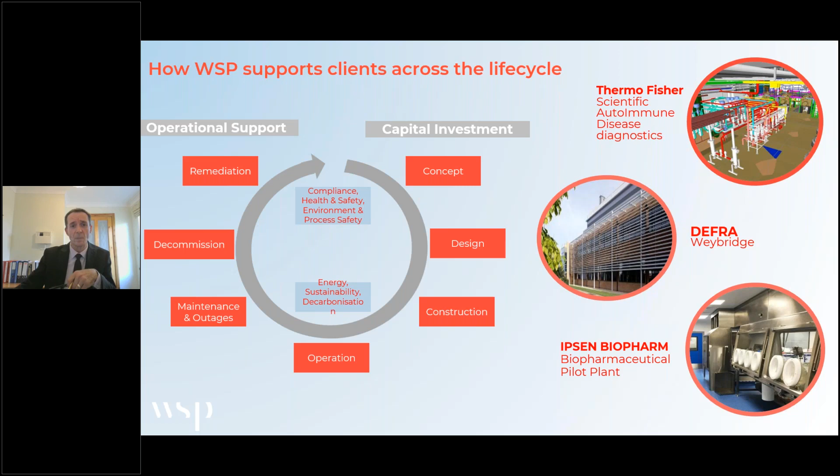So just to conclude, really, a few areas where biochemical engineering is really impacting on the future, and where the application is really going to provide us with the solutions that we need. I've just picked three to talk about for a few moments: food production, energy, and pharmaceutical development.

So when we think about food production, the challenge for us really is how do we feed our ever-increasing global population, and we need to use our resources much more efficiently, find lower intensity ways of producing food. For example, alternative food sources, synthetic proteins, etc. Novel food production to reduce the amount of energy that we're using, and thinking about things like sustainable packaging, using biodegradable and compostable food packaging produced from wood-based products, cellulose fibers, etc. So food production has some big challenges, but also the opportunities for us are also endless as well.

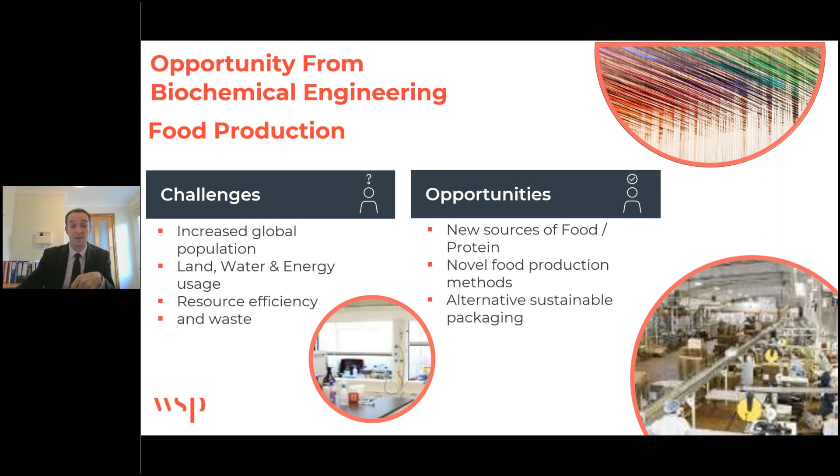Pharmaceuticals - I think we've obviously all lived through and still living through a global pandemic, and that's really just highlighted some of the ways that we need to work in the future. Looking at our manufacturing capacity, being able to respond and rapidly build up new and alternative manufacturing capacity and routes, rapid design and build solutions. If you think about the whole issue of providing the vaccine program and the testing program, we've had to respond much more quickly than we ever have before to this sort of issue. And I think that will be a theme going forward. As pharmaceutical engineering teams, we need to be much more responsive and reactive.

And then thinking about things like targeted medicines for individual patient delivery, cell and gene therapy, etc. So again, lots of challenges, and much of that met through biochemical routes.

And finally, energy. A very big topic. I think in this case there's no one-size-fits-all solution; there are lots of different solutions which will contribute to the overall strategy going forward. We're thinking about making sustainable energy, reduced use of fossil fuels, net zero, and the impact on our environment, with many biochemical routes as part of this solution - the next generation of alternative fuels and renewable energy sources, looking at how we can use organic routes to produce energy.

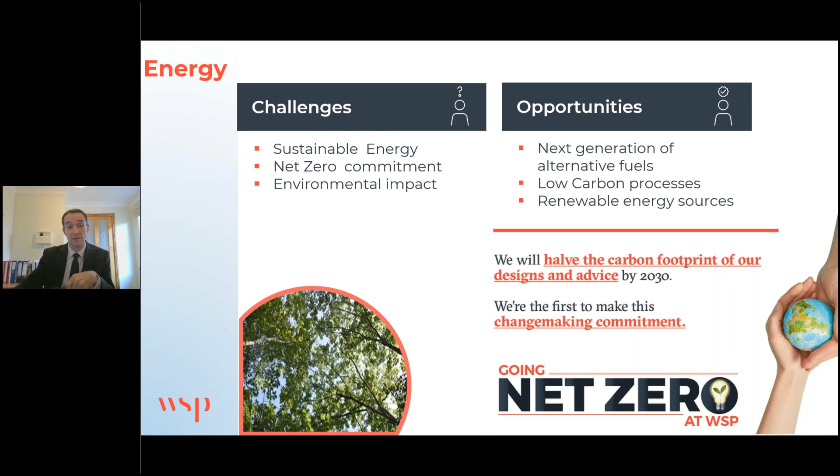So that was a whistle-stop tour of biochemical engineering as I see it, and WSP and some of the work we're involved in. I think now it's time to move on to the main event of this morning, which is hearing a bit more about some of the fantastic projects we've been working on as part of our global IChemE award process. I'm happy to take questions, but I think we probably want to move on to the main event. Thank you very much for listening.

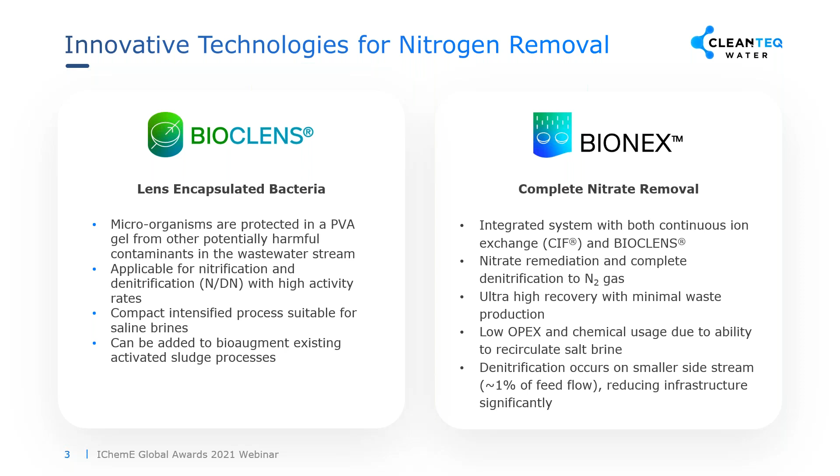In this approach, we use continuous ion exchange to concentrate nitrate from low levels found in wastewater up into very high concentrations, where they're then fed to the BIOCLENS, which operates at very high activity rates, completely removing the nitrate from the system and producing inert nitrogen gas into the atmosphere. This has a number of benefits, including very high recovery levels, low amounts of waste, and very high reductions in chemical consumption.

If we take a look at what the BIOCLENS looks like, the encapsulated bacteria, selected either for nitrate or ammonia removal, are held within a porous matrix that the substrates can pass easily through. This helps keep the bacteria within the cells themselves. Rather than free cells floating around a reactor, the bacteria all live inside this PVA gel carrier, and the substrates pass to and from this matrix.

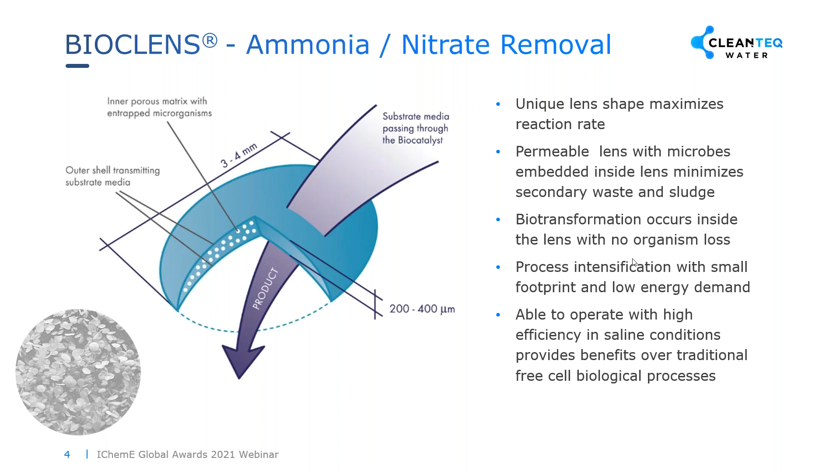The unique aspect of this technology is the ability to maintain very high efficiency levels in very saline conditions at or above that of seawater, or in very high strength brines, which are typically used for ion exchange regeneration, where standard free cell bacteria cannot easily function.

We've started manufacturing these on a large scale in the last year at a facility in China, currently with a capacity of around 40 tons per year. We've already got a number of users in that region being used across aquaculture and wastewater treatment.

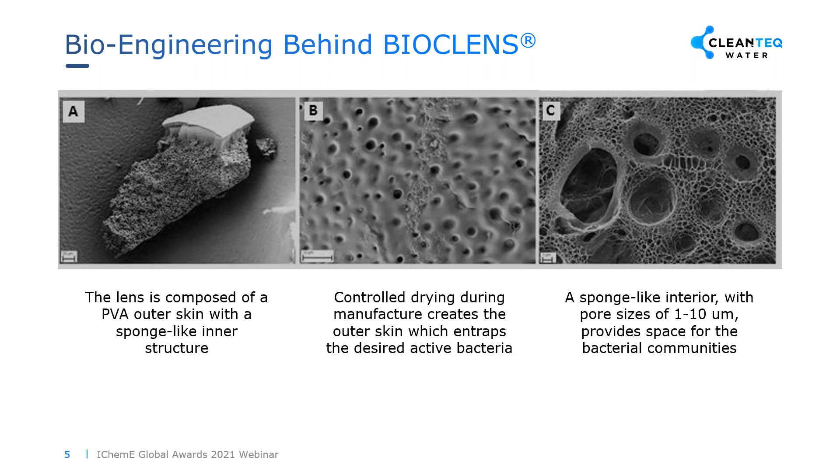So we take a short dive into what denitrification is. This is the process of converting nitrate to nitrogen gas through bacterial technology. With the BIOCLENS bacteria, this occurs when oxygen levels are low, so under anoxic conditions, typically when the dissolved oxygen is less than about half a ppm. When oxygen levels are depleted, nitrate becomes the primary substrate.

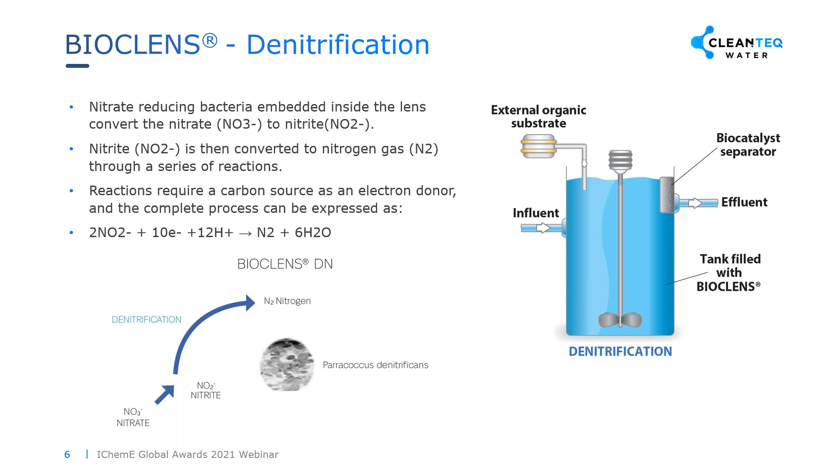When bacteria break apart the nitrate, it's first reduced into nitrite, NO2, and in turn into nitrogen gas. A carbon source or organic substrate is required for the reaction to occur. Typically, we use acetate, methanol, or ethanol. And if there are simple chain organics present in the water already, these can also be used as a food source.

In the BIONEX approach, which has been developed over the last year or so, we employ continuous ion exchange, as mentioned, to concentrate the nitrate. In this example, we've taken it from about 5 to 10 ppm up to around 200 ppm. The treated water coming out of the ion exchange process can be controlled to less than 1 ppm, which is suitable for low levels of discharge.

The limiting factor with typical batch ion exchange processes is that they can be affected by bacteria and sludge, causing fouling in the system. But the unique aspect of our countercurrent ion exchange process is that we are continuously moving resin counter to the water going through the system, so we can manage levels of fouling very easily.

The treated brine is then filtered after coming through the BIOCLENS, where we purge typically less than 1% of the flow of the whole system.

The waste from this filtration process can be returned upstream if there's an existing wastewater treatment plant, or it can be blended with the product or back into the feed, so we can maintain a zero liquid discharge approach, which is very important these days in terms of reducing footprint of evaporation systems.

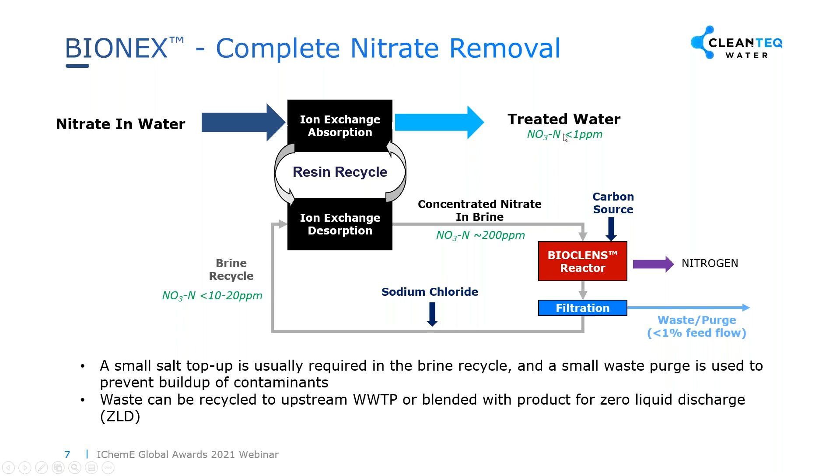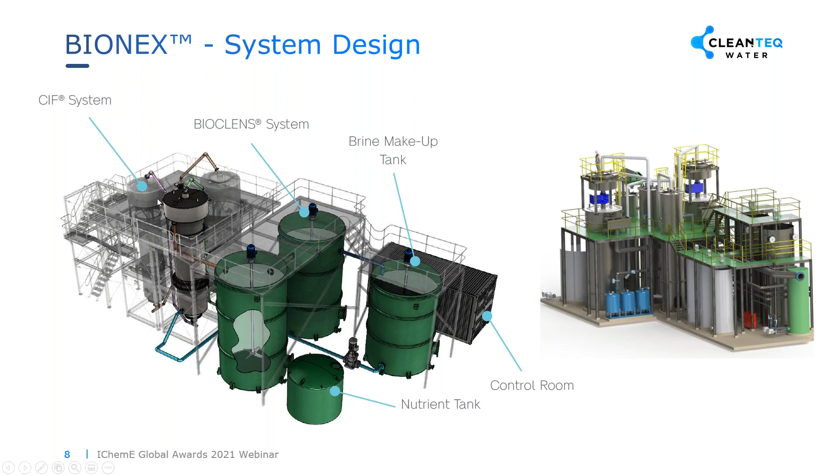So a full-scale plant is typically what you might see here. You can see on the left-hand side the continuous ion exchange system, which has a number of columns for adsorption, desorption, and wash. The BIOCLENS reactors typically have 1 or 2 slowly agitated reactors with a special mixing blade design installed in them, which is low shear.

Other components of the plant typically include some process tanks, dosing systems, and electrical and control systems for full automation.

We actually do have a full-scale flagship project, which is due to be commissioned at the end of the year. This is for 12 megalitres per day, which is going to treat coal mine wastewater up in northern China.

We've also been doing a number of pilot trials for customers. In Tianjin, China, we've been testing for around 6 months to provide a proof of concept to a client who's struggling to reach a low set of discharge limits with their existing system and currently being fined for it. Our pilot treated up to about 100 cubes per day with a skid-mounted CIX system, ion exchange system on the left here, and 2 stages of bioreactors.

You can see the inside of the bioreactor on the right in the video. The lenses that do look brown, that is not because of sludge, but it's because of how they actually turn when they're operating at high levels of activity. They come off the manufacturing process clear, and then when they're operating at high levels, they get browner and browner in color.

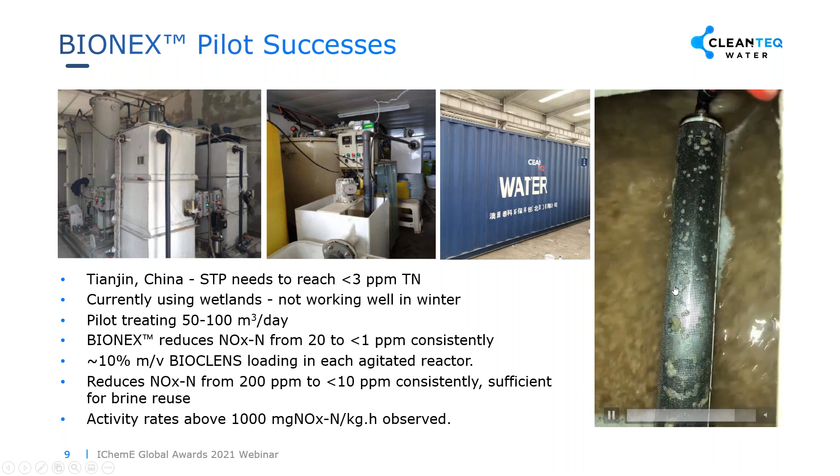Just to have a look at some of the pilot results, this is what the BIONEX overall looked like over quite a long period of time. We reduced from about 20 ppm of nitrate to basically less than 1, which was more or less undetectable levels. This resulted in a brine coming off the desorption step of about 200 ppm.

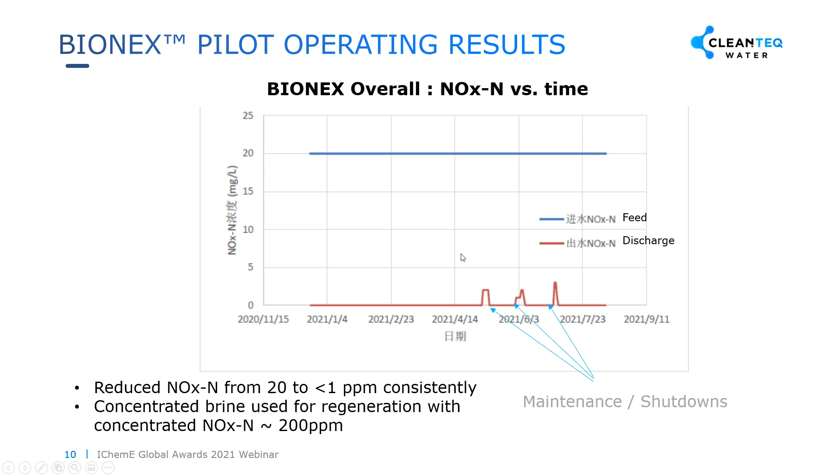So then looking at the bioreactors themselves, after a few days of the bacteria warming up from cold storage, which is typically what you find for bacteria - they need some time to wake up - the 2 stages of reactors were found to consistently remove nitrate down to less than 10 ppm. This green curve here is what happened coming out of the second reactor.

We were about halfway through when we decided to try and reduce the carbon to nitrate dosing, which we did a bit too much to start with, and then eventually managed to optimize it and find a level that was optimal.

In a number of other trials, we also managed to reduce the amount of loading of BIOCLENS that we had in the reactors. Here we had about 10% loading of mass per volume. We've actually found that we can get down to as low as 2% as well, with activity rates around 1,000 or even higher in terms of milligrams of nitrate per kilogram of lenses installed. And this is all with only about 2 hours of residence time in each of the reactors.

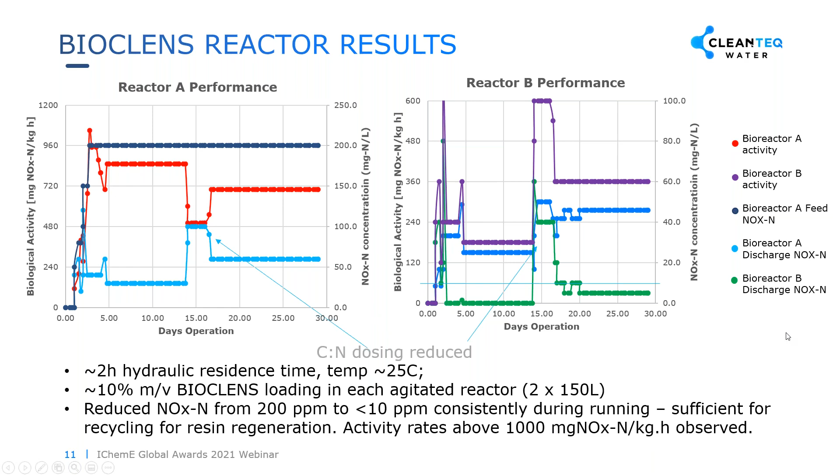So just to conclude, we believe that the encapsulated bacterial technology, coupled with our innovative continuous ion exchange process, can provide a fundamental shift in how we apply bacterial solutions to water treatment in reaching very low surface discharge levels for the future. We believe this is going to provide a route to enabling reuse of wastewater, as well as reducing demands of clean drinking water for other purposes. And obviously that can help to reduce harmful algal blooms and eutrophication of water bodies through reducing those nutrient loads as well.

The resulting process has very low OPEX. We typically use less than 10% of the salt that a typical batch process would use, and the cost of treatment is typically less than 10 cents per cube treated.

And we're not stopping there either. We're looking at future developments, including phosphate removal as well, trying to recover a solid reusable phosphorus product through using specialty doped ion exchange.

So that concludes our presentation. I hope you've enjoyed it, and we'd like to wish all the finalists best of luck.

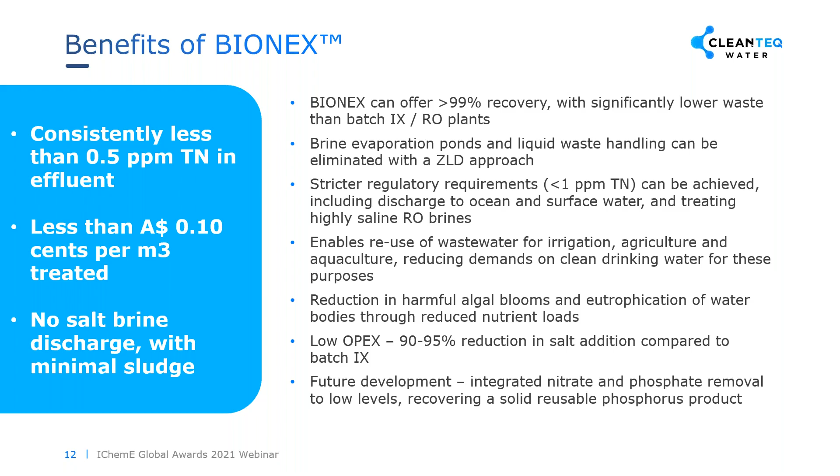Hello, good morning. So, good morning. We had the introduction from Simon Lewis, where he mentioned vaccines and the way they've changed the world over the last 18 months or so.

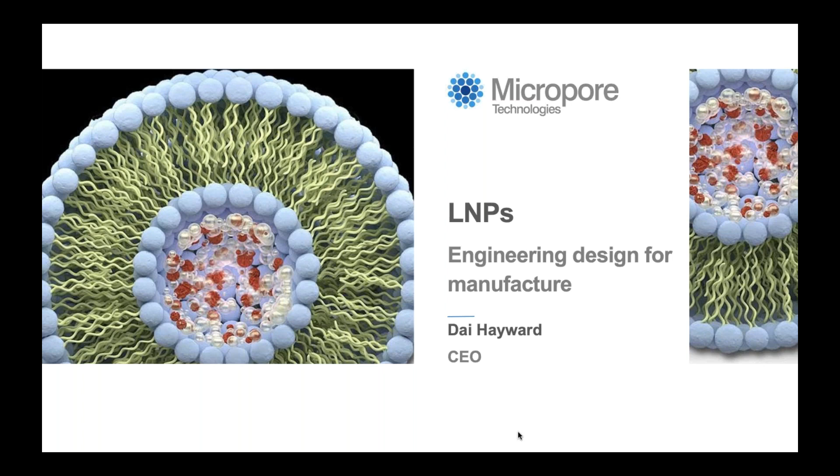Micropore Technologies' entry in this category is around engineering the design for manufacture of mRNA vaccines, which use lipid nanoparticles, LNPs, as an integral part of the way that they are manufactured. LNPs are integral because they're needed to smuggle the RNA into the body without it being recognized as an alien invader.

Traditionally, micromixing is the key to manufacturing good quality product, and typical manufacturing routes have historically used either microfluidics or impinging jet/T-junction mixers. The scale at which these operate is not continuous, in as much as microfluidics run at small scale but do not scale up to the sort of scale and quantities that Pfizer and Moderna are using. So they use a different technology, which is impinging jet.

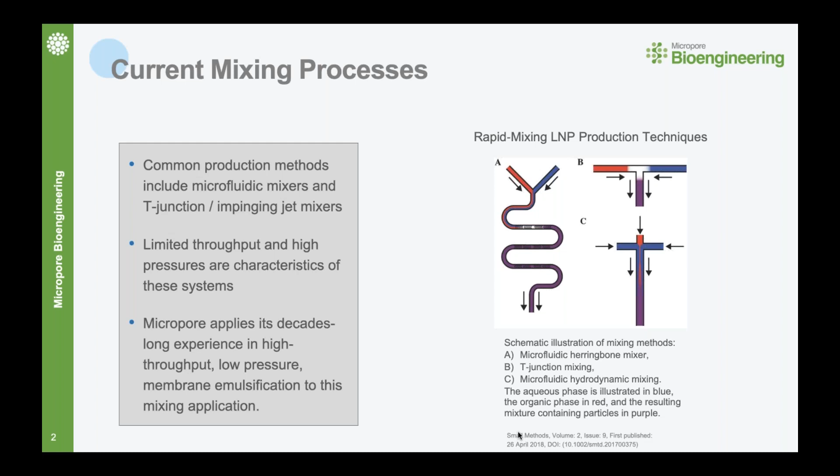There are various pluses and minuses around those, but what we set out to do was to design something that would seamlessly go from the smallest quantity you might want. Because materials at the early stages, and all the way through, are rare and expensive - mRNA is extraordinarily expensive - you want to start with a very small quantity, but be able to build that up consistently and reliably with good scalability.

On the left-hand side, we've got what the market told us it wanted, and on the right-hand side is our response to that: the ability to produce the AXF Mini, which is about 2 centimeters long and about 1.5 centimeters in diameter without the clamps. It's very easy to use, and it's a very, very small volume.

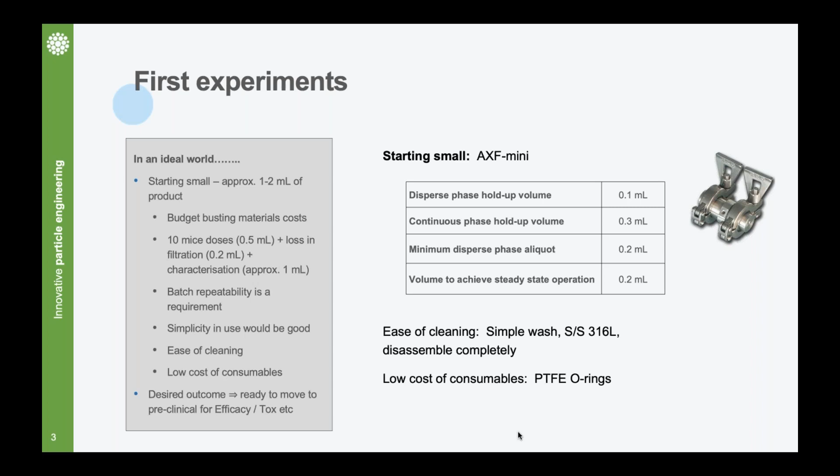On the basis that you can use that for very early lab experiments, it's very flexible to go on to clinical materials, because if you run it for longer, you are capable of creating 20 liters per hour of product, which is big enough for clinical trials, and even some small patient populations. So you've got something that's really very small, very flexible, and allows you good batch repeatability.

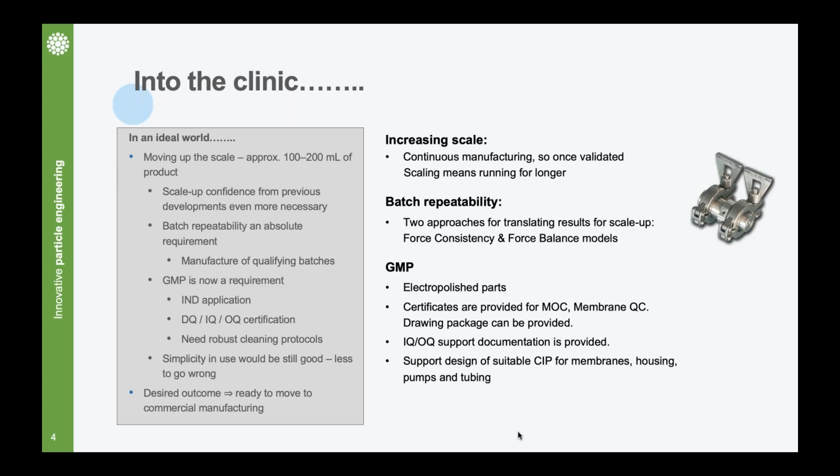Because it's all 316L stainless steel, electropolished, it is GMP compliant, and we provide all the necessary documentation and support for that. Then into manufacturing, if you really do need the sort of quantity that Pfizer and Moderna require, the AXF1 gives you up to 200 liters an hour and still has the same benefits: no moving parts, no consumables, very easy operation, and both have the capability of a process analytics control loop, meaning in real time you can measure online what's going on and correct for deviations by altering the process parameters.

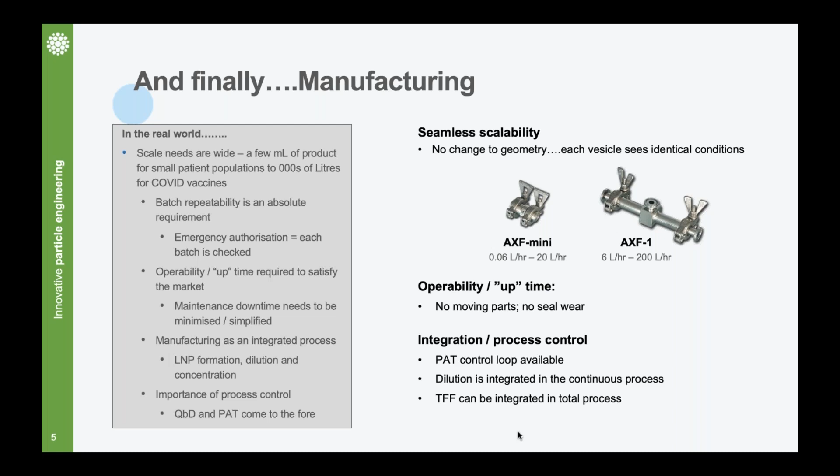It's a quality by design approach to this. It's an integrated system that would give you, if you wanted, straight through flow into a fill finish in a vial.

On the left-hand side is a very typical, well-recognized formulation for a model. We also have control over the components involved in the device, such that if we change the pore size of the internal membrane or the dimensions of the annulus, we can control the outcome in a very predictable way. We can manufacture product to precisely the specification our clients want, which is really rather good and very useful because it gives a lot of flexibility. The fact that we can predict it means you can include that PAT loop.

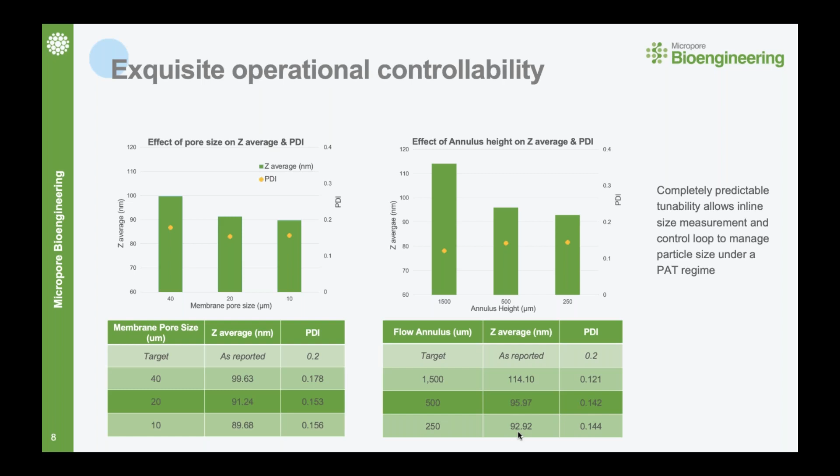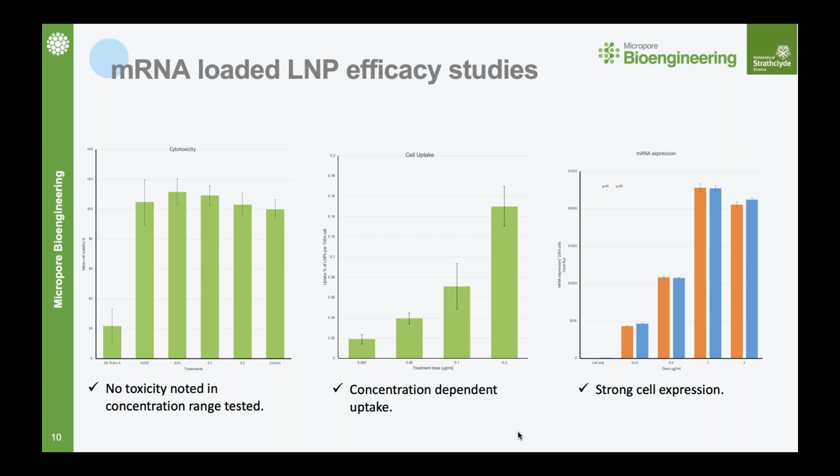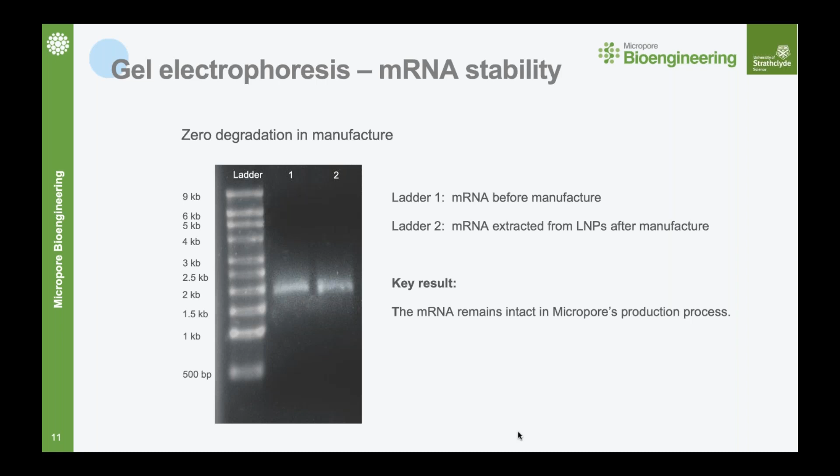One of the key things is that this is a very low shear process. As I've mentioned earlier, RNA is expensive but also very fragile. One of the things we can demonstrate, as shown here, is that before and after our process using the AXF Mini, we have no degradation of mRNA. That compares and contrasts with other processes, which are high shear and high energy, and damaging to mRNA. So from all perspectives, there's a win-win-win all the way around on this.

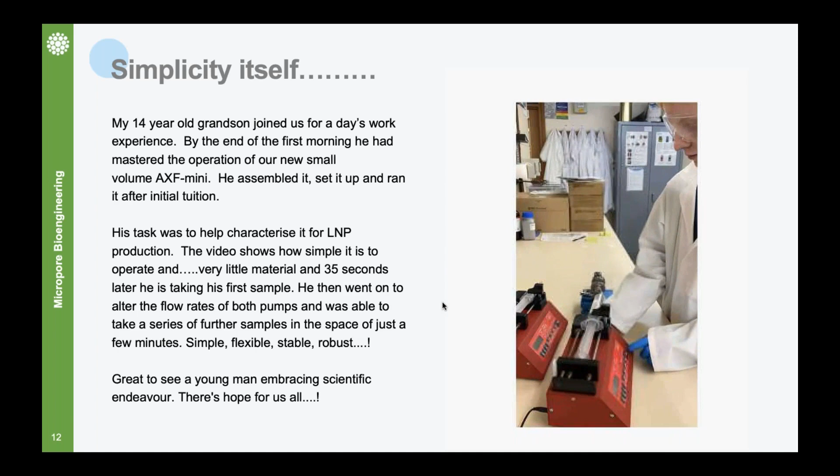Just to illustrate how simple this is - I set up the design criteria with our engineers to say I want this to be a very simple thing to operate. So I had my grandson in, who came in for a day of work experience, and he had no familiarity with any of this sort of equipment before. He set up the device, pressed the buttons on two syringe pumps to get them pumping, and we can see the material flowing through into the AXF Mini and then on into the sample collection beaker.

At a point you will see him change over - there we go, change over and start collecting a different sample. And if you change the flow rate, you can start collecting a different sample again. You can do that for as many samples as you like while you still have a syringe full. So you've been able to produce initial material, but that same device will go up to full-scale manufacturing at 20 litres per hour.

Ladies and gentlemen, thank you very much indeed. I'm now happy to hand back to the controller, the host, and take any questions.

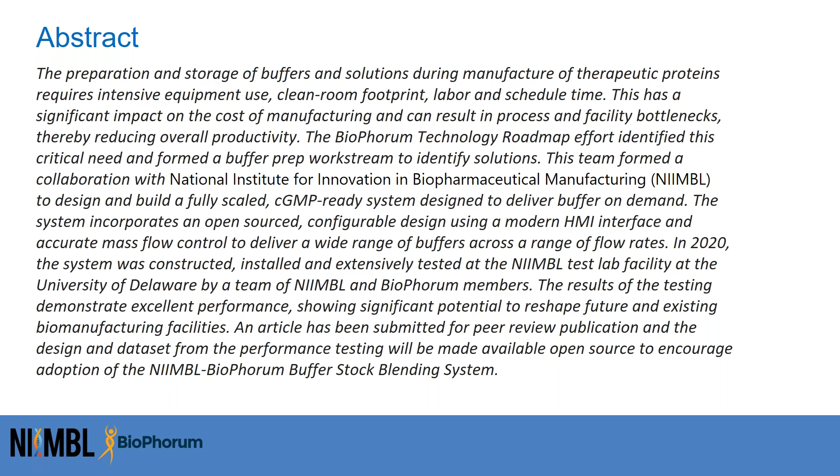Last year, the system was constructed, installed, and extensively tested at the facilities of NIIMBL and the University of Delaware, with a team from both NIIMBL and BioPhorum. We're going to share the outcomes of this work in this presentation. An article has been submitted for peer review publication, and the design and dataset from this work will be made available open source to encourage adoption of this development, the buffer stock blending system.

If we look at the buffer management problem, essentially upstream intensification and process optimization is driving our industry towards smaller and more flexible operating footprints in biomanufacturing facilities. Many of these will be comprised primarily of single-use or hybrid technologies, capable of producing a significant amount of drug product. Knowing that downstream operations are product mass-based, any increase in productivity upstream will lead to a proportional increase downstream in buffer demand.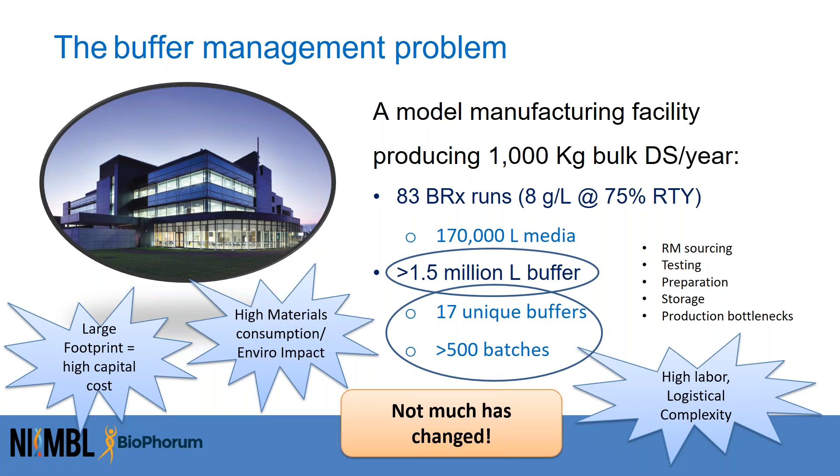The design concept put forward was essentially: when you make a buffer, there are four components: an acid, base, salt, and water. These four components are sufficient for the majority of buffers, and you could have 6, maybe 8 stock solutions, and the blending, mixing, and diluting of those stock solutions could deliver upwards of 15 buffers downstream. So it really was a simplified approach.

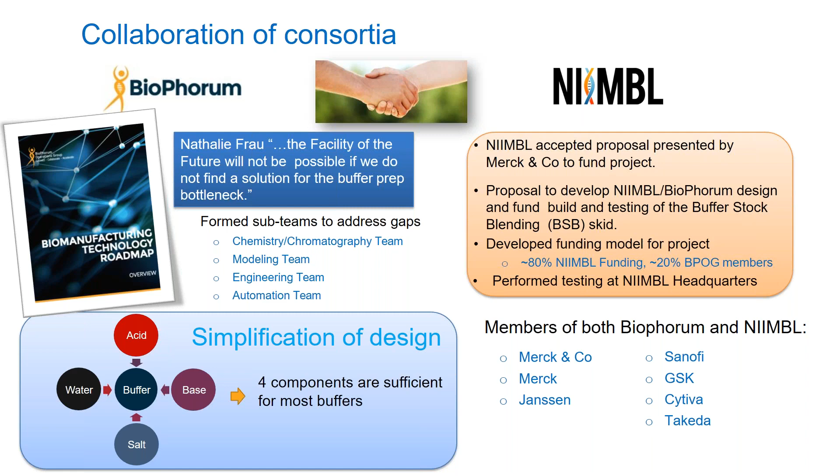We then reached out to NIIMBL, and a proposal was made by Merck & Co, one of our members, for NIIMBL to co-fund the project. We developed the proposal to fund, build, and test the buffer stock blending skid, and it was 80% funded by NIIMBL, 20% by BPOG members involved. All that work was done last year at the University of Delaware, with teams from the companies listed here: Merck & Co, Janssen, Sanofi, GSK, Cytiva, and Takeda.

So really, why are we doing this? Why did we take this approach? We wanted to democratize technology, make it available to all, and come up with a solution that would help simplify buffer manufacturing and production, reducing the cost of that process and making it more value-add rather than non-value-add. The work we've done last year is really to generate all the data to demonstrate that this concept does work, because in doing so, we believe we can accelerate adoption within the industry of moving buffer prep from the old-fashioned ways of doing things to something far more suited to today's manufacturing requirements.

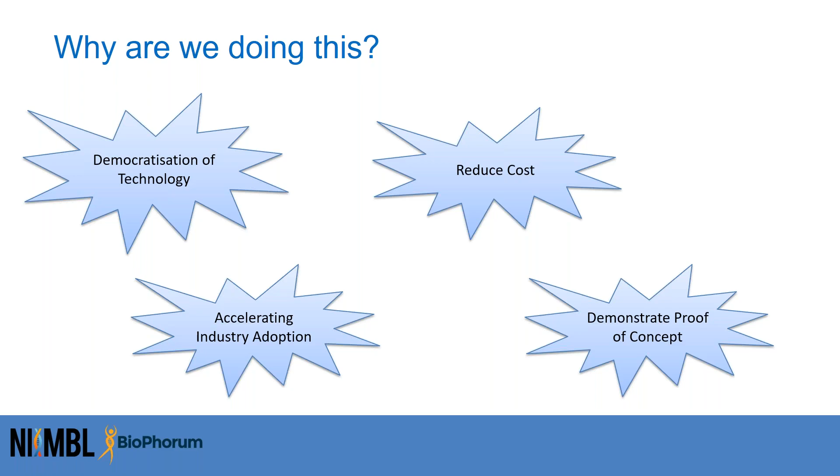And the idea of the project is to really drive change in the industry.

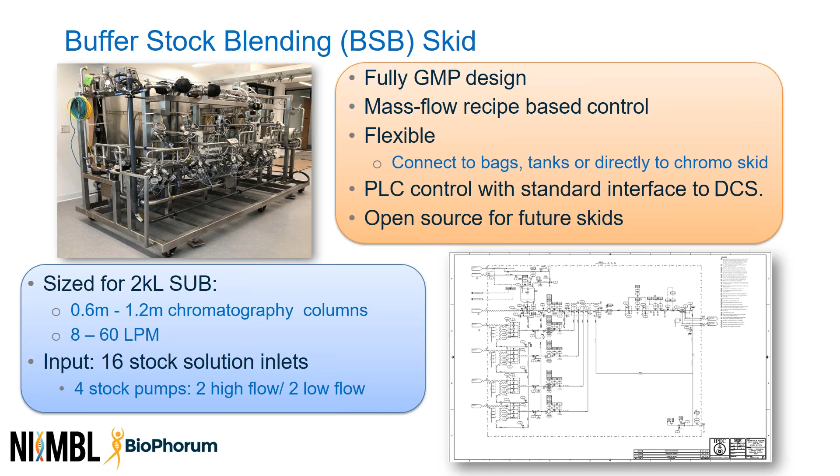The skid we built is sized for a 2,000 litre single-use bioreactor process, looking at 0.6 to 1.2 metre chromatography columns. We can make buffer at 8 to 60 litres a minute. It's highly flexible, with 4 stock pumps where you can connect up to 16 stock solutions. The idea being you can connect all your stocks, do your setup, and make the wide range of buffers needed for the process.

In terms of our achievements to date, it's been a fantastic collaboration, and there's been great engagement across the different companies and organizations involved. We've designed the system, we've built the system, and we've completed testing. To date, there's 2 white papers published. They're available on the BioPhorum website, and there will be an addendum and a peer review paper coming soon.

I suppose it's been a great testament to the collaboration of the team, how far we've come. We started off as a concept, and it's really the whole industry coming together to solve a common problem, and then sharing that design and making it open source and freely available.

Those are the initial impressions and how the skid works. So the speed at which you can make buffer is an absolute game changer. When you're making buffer at 60 litres a minute, compared to traditional buffer prep, it might be 1 prep per tank per shift. So you need an entire shift to make, say, 3,000 litres of buffer in a tank. With this system, you make that same amount of buffer in less than an hour.

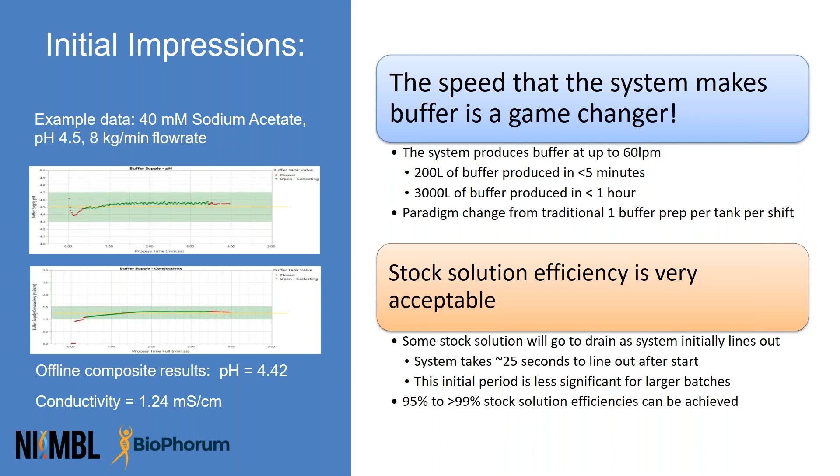Looking at the benefits, the idea is that this system can have a significant or transformative effect on facility design and operation. By making buffers from a common set of stock solutions, to make 15-20 buffers, you might need, say, 7 single component stock solutions. So now you're down to making 7 solutions per batch instead of 15 or 20.

The fact they're highly concentrated single component, now you don't even have to make them every batch. You can keep the volumes relatively small and still make them for multiple batches, or even have the opportunity to outsource. Also, through significantly reducing the volume of liquid to be stored and handled, in the case of going direct to a chromatography process, you can eliminate the need for buffer hold completely.

I think we did a detailed economic study at both 2,000 litre single-use scale and 12,500 litre scale. We looked at that for a wide range of product titers from 2 to 10 grams per litre in both cases. In every scenario, the use of buffer stock blending reduced the overall net present cost and the overall cost of buffer.

And the main savings are on the operational cost. At the smaller scale, because you're making buffers so quickly, it's a lot less labor intensive, so there's significant savings there. And also you reduce consumables costs through the reduction in volumes. At the large scale, even the capital cost goes a bit lower. So it's savings all around, with the exception of consumables costs.

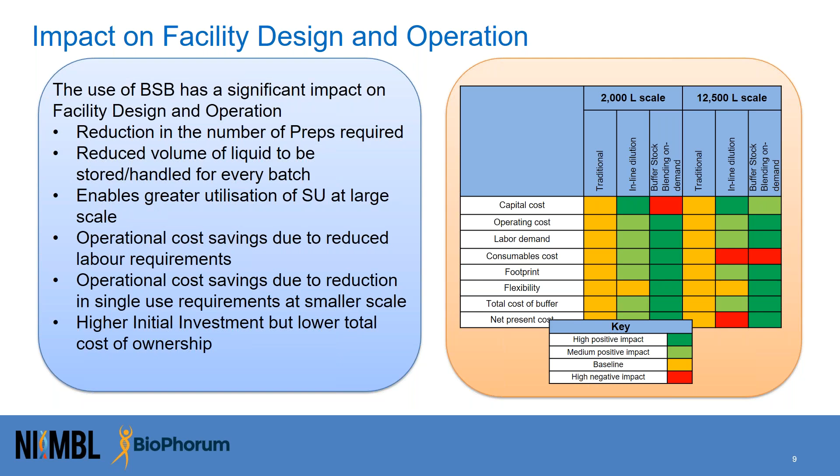So in conclusion, traditional buffer prep requires significant amounts of labour, capital, footprint and time. Typically, it can account for about 20% of the overall cost of manufacturing, looking at your capital and operating costs. BioPhorum identified the potential for addressing this area in the technology roadmap and identified it as a key problem that's common across the industry.

Through BioPhorum, we put forward the initial design concept, and then that design was funded through NIIMBL, and we've built and performed testing on the skid, basically showing that the concept really does work. And we can produce a very wide range of buffers in real time and go direct to the process. And the whole open source nature demonstrates a technological advance with the potential to transform the industry.

We like to think this project can inspire other similar projects where the industry is coming together to solve common problems. No one company on their own has been able to solve this problem. It's a high cost, it's creating bottlenecks in industry, and by coming together, we're hoping to change that.

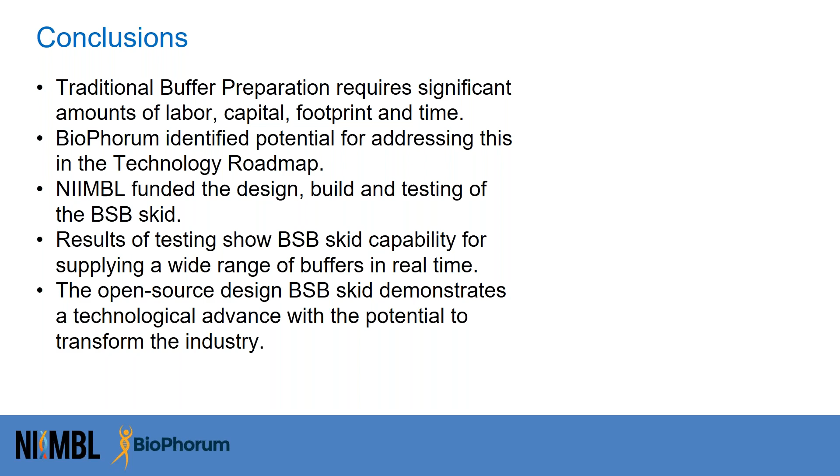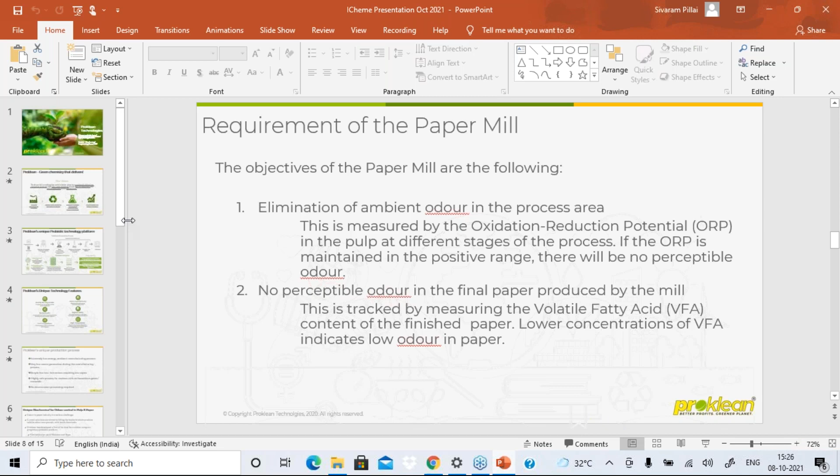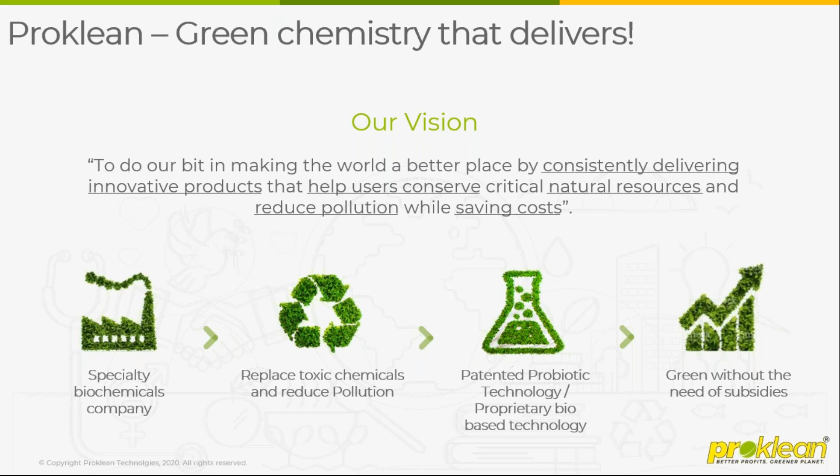We are a company based here in India, in the southern part of India, and our main business is in replacing chemical surfactants and some other kinds of chemicals used in processing industries with a biodegradable, non-toxic option made using a probiotic technology. I want to spend a minute or so on talking about how we do things.

Then subsequently, that compound is formulated in the end-use product. Literature shows, and my own experience shows, that 60 to 80% of the total production cost is actually in the downstream processing steps. Compare that to what we actually do. We have some unique approaches to making our product and significantly reducing the cost.

Number one, we use a consortium of microorganisms in the culture which we use. The culture we use typically contains about 15 different species of microorganisms. Using locally available feedstock, we carry out the fermentation under some unique conditions. One is that we don't heat or cool the fermenter; the fermentation happens under ambient temperature.

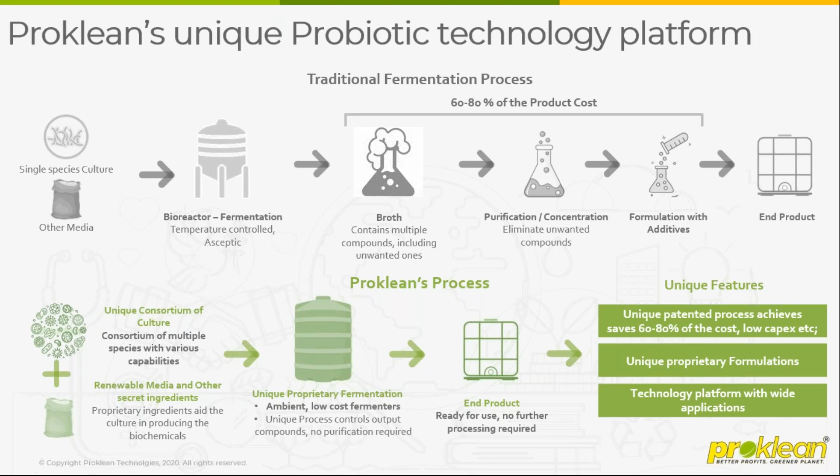And then by not using any energy during the production, we are further reducing the cost of production. So this is what helps us to be very green in our manufacturing process as well as low cost in our manufacturing process.

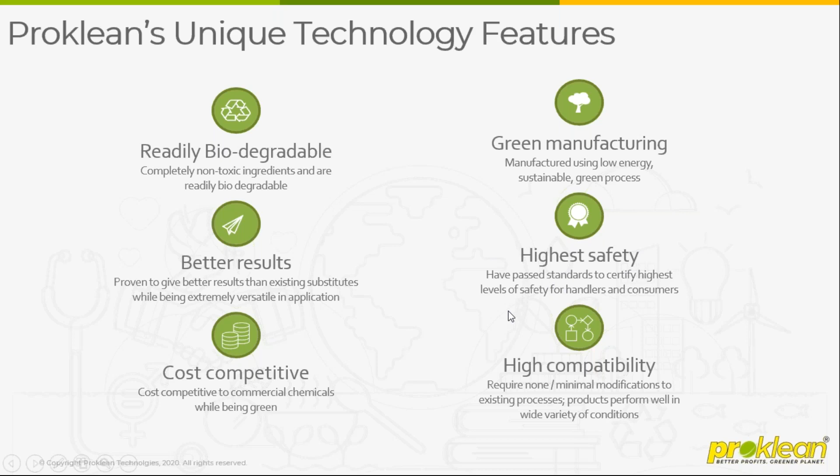So the products we make are readily biodegradable. They're cost competitive because of what I mentioned, and because the microbes we use are all GRAS listed microbes, it is extremely safe for the people who are manufacturing the product. Low energy, very low waste generation, simple low cost fermenters, highly safe for the workers, no downstream processing.

Coming to the application for which we filed our application in the Biochemical Engineering Award section, it is an approach to reducing or eliminating odor in pulp and paper mills.

Pulp and paper mills have a major challenge in terms of odor. Those who work in the industry know very well this challenge.

Current solutions for this problem are aimed at killing the bacteria using biocides, including hypochlorite, so that the bacteria responsible for producing the volatile odor compounds no longer survive in those process conditions. While they get reasonably okay results, it is not completely satisfactory to the customer.

That is where we come in. We have developed a first of its kind formulation using the proprietary probiotic platform, which I described a little while ago. This whole system eliminates use of biocides and hypo.

So we significantly reduce the amount of chemicals which go into the operation. Manufacturing is low carbon footprint, and as I talked about, the way we manufacture is a circular process, and it addresses the root cause of the odor problem, which is the bacteria responsible for producing the volatile fatty acids.

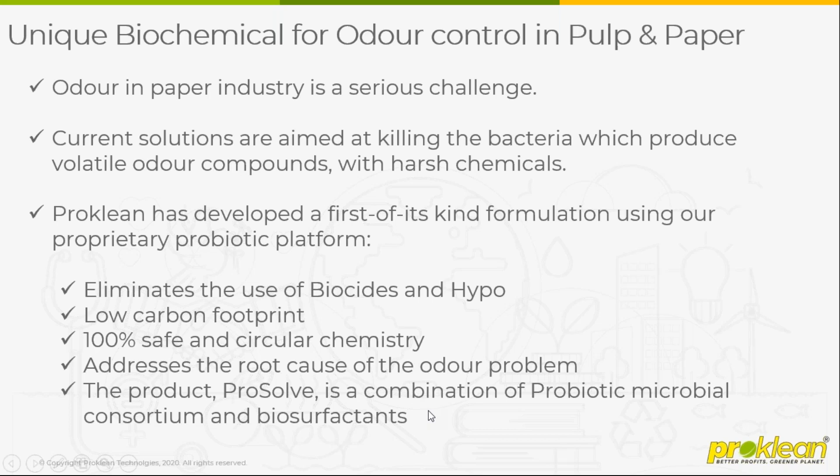The mechanism is very simple. The biosurfactant present in the product breaks up the existing biofilm of the pathogens, the anaerobic bacteria which produce these volatile odor-causing compounds.

Once you break up the existing biofilm, the probiotic bacteria present in the culture which we apply begin to establish beneficial biofilm on the surface of the vessels or the pipes in the process conditions.

And once the probiotic blanket is formed, pathogenic bacteria find it impossible to establish a biofilm again. Thereby, they don't survive in the system, and hence no volatile fatty acids are produced. So, a very simple approach, yet effective in producing the results we are looking for.

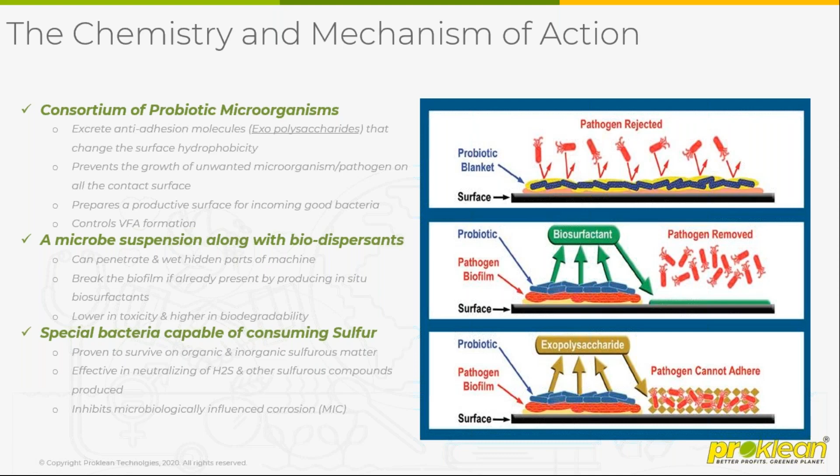Paper mills normally have two main objectives when looking at the odor control program. One is elimination of the ambient odor in the process area. This is typically measured by the ORP levels in the pulp they process, measured at various points and recorded.

If the ORP is maintained in a positive range, let's say +25 and above, then they know the odor-causing bacteria will not thrive in those conditions, and therefore there will not be any odor.

The second objective the mills have is not to have any odor in the final paper produced. They track this by measuring the volatile fatty acid content after the finished paper is made. Lower the concentration of VFA, the better it is, and it indicates there will be no perceived odor in the paper.

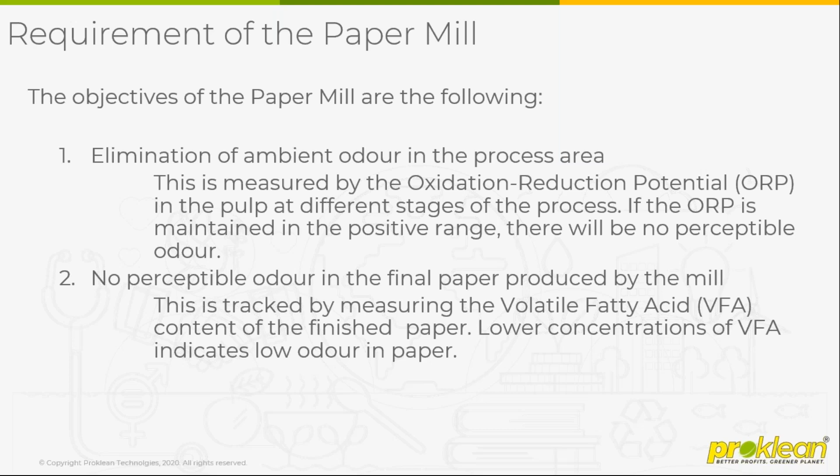Once we started using our product instead of the biocides and hypochlorite they were using, we started to see ORP improve. It came into the positive range compared to when it was negative before. Odor in the process areas within the mill was no longer perceived by the operators, making the place better to work in.

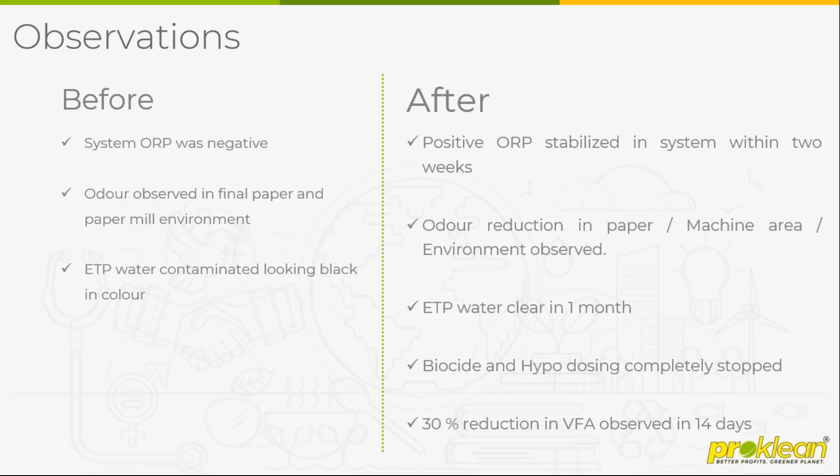The effluent treatment plant showed clear water within a month of us starting operation. Of course, biocides and hypo were completely eliminated, and in the finished paper we saw more than 30% reduction in VFA.

This slide actually shows how the ORP numbers moved in the pulp being processed. Before we started applying our product, when hypo and biocides were used, it was still fluctuating and typically in the negative region. Within a short period of starting the application program with our product, it started to build and become positive.

Over a period of a month or so, it stabilized in a very positive range and continued to be maintained at that level. After a couple of months, the operating mill wanted to check if they shifted back to biocides and hypo, whether they would get the same results as with our product. So they stopped dosing our program.

Again, we saw that the ORP levels started to go down into the negative region. They restarted with our program and the ORP levels came back into the positive numbers. So clearly, the approach we had taken was serving the purpose and giving them the results.

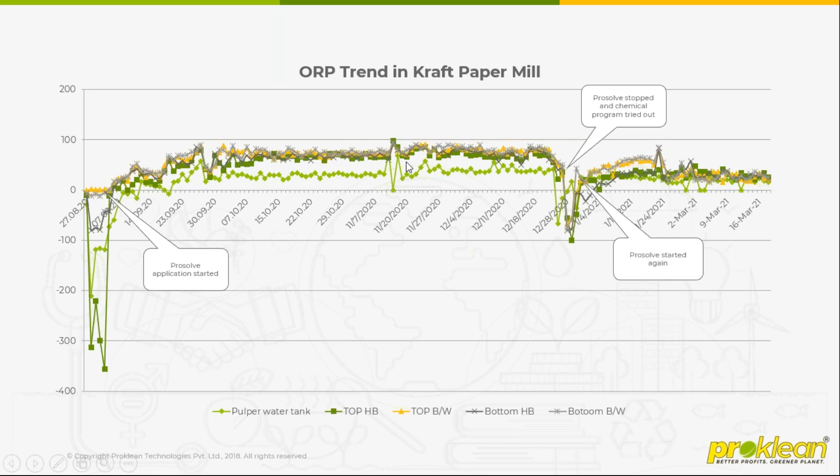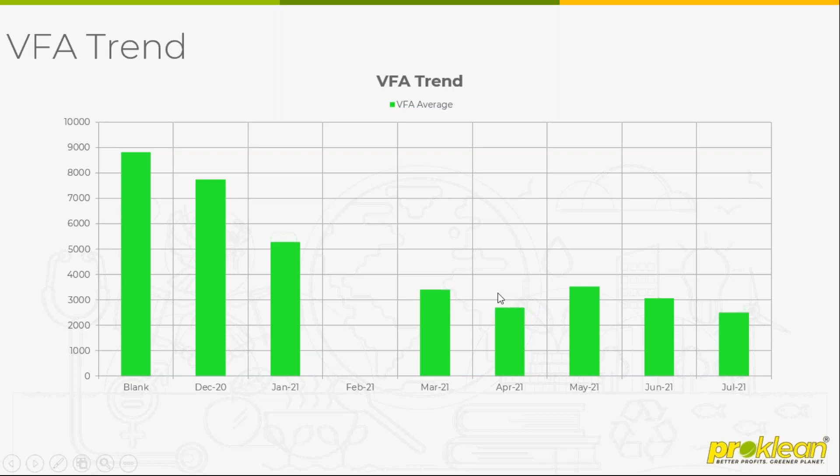The finished paper's volatile fatty acids were analyzed, and over time after they started our program, there was a significant reduction, up to more than 50%, in the VFA, to a level that there was no longer any perceived odor in the finished paper. So we were able to achieve both objectives of the mill with this very simple approach.

A picture of the mill: what you see on top are pictures of the inside of the mill before they started our program, when they were using biocides and hypo. You can see significant levels of biofilm and slime forming in the pipes and screens. After 3 months of starting with our program, a very clean system is seen, with hardly any growth of slime or microorganisms.

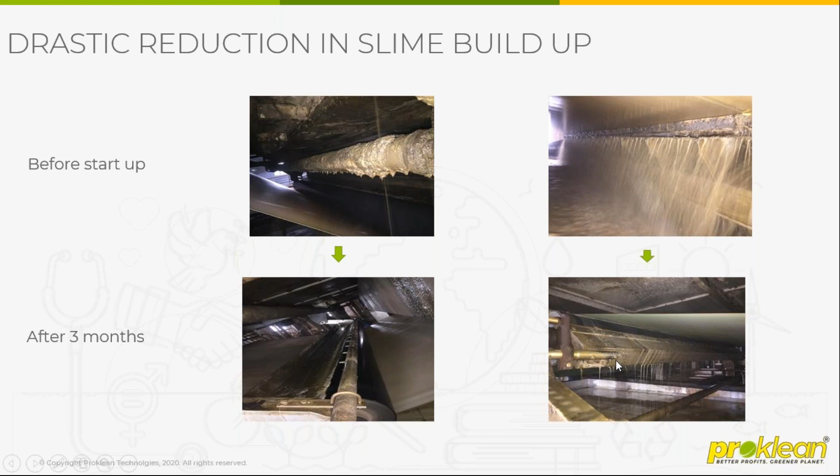Proklean as a company has been working over the last 7-8 years, and over this period of time, we have stopped 7,200 metric tons of carbon dioxide from being released into the atmosphere because we replaced chemicals that customers were using before. In the process of having a green manufacturing system and a biodegradable product, we have reduced this carbon footprint over the last few years. This is almost equivalent to something like 6.3 million passenger kilometers of an aeroplane.